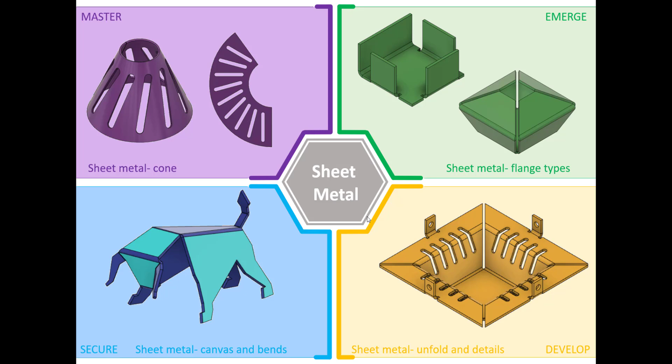So what we're going to do now is jump over to Fusion 360. So we're in Fusion, and what you can see on here is the first challenge. So what we're going to go through is how to set up this sheet metal part and how to create what are called flanges, which you can see around the edge of this design, and also the base is classed as a flange as well.

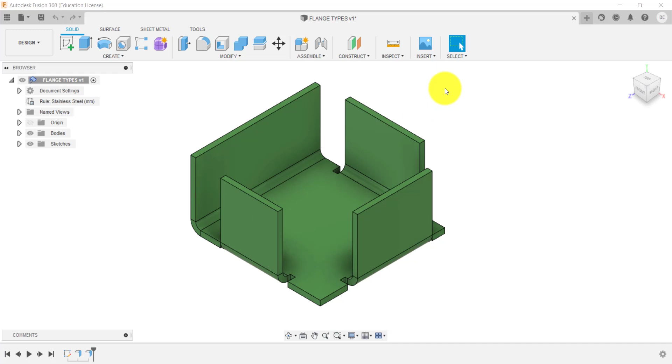So we're going to go up to plus, and we're going to create a sketch in a normal way by clicking on sketch, and I'm going to create one on this top plane. I'm going to create a center rectangle of 50 millimeters by 50, and I'm using the tab key on the keyboard to go between those and click enter.

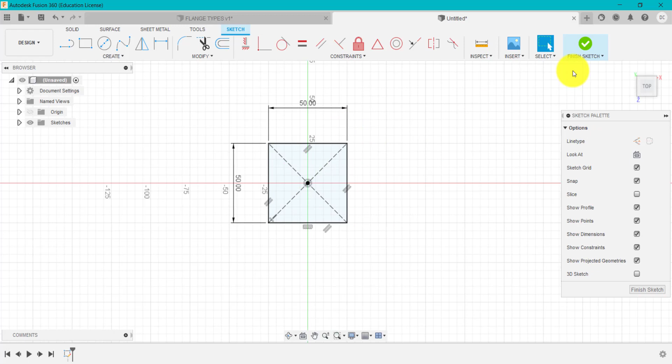Normally, if I wanted to turn this into a 3D shape, I could use any feature around here, like the extrude, and extrude this up to the thickness I want to start my design. However, what we've got to do when we're creating a sheet metal part is go up to sheet metal and create what's called a flange.

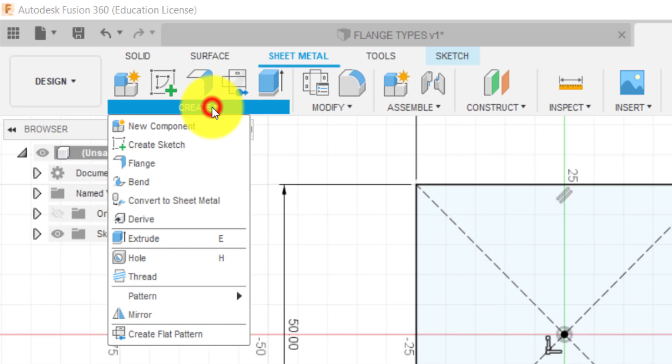I'm going to select this design I've created, and if I go to the front, I'm just going to move this towards one side. What we've got here is side 1. That will create the design above the sketch. If you go to side 2, it goes below, and if you've got symmetric, that goes either side. So if this is a 3 millimeter sheet metal design, it's going to do 1.5 either side.

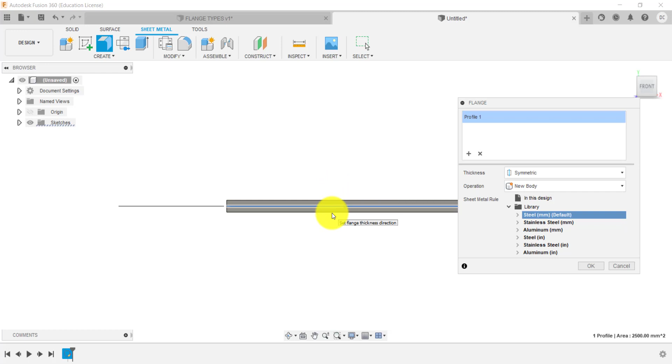So what I'm going to do is just do side 2, and that's going to go on the underneath of the sketch. Here I've got different materials in inches and millimeters, and if I look at the default, for example, in millimeters, it tells me that's 2.5 millimeters thick, and it also looks at the K factor, which is to do with the bends and thicknesses, and also you can see here we've got some other dimensions as well.

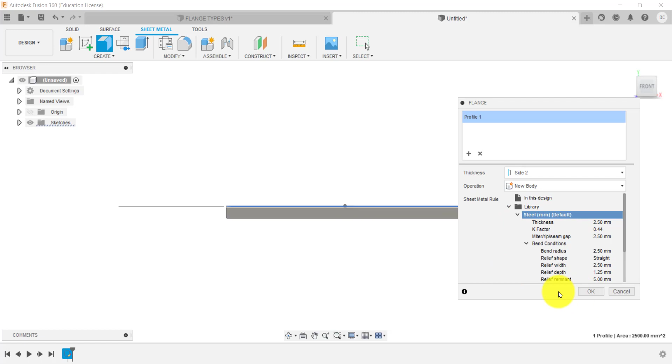But as an introduction, we're going to keep to this simple default. I can show you later on how to change this as well, but we're going to go for the default option. What we're going to do now is add some flanges. And if you hover over the flange tool here, or go create flange, it will give you a bit of a preview of what the tool is used for.

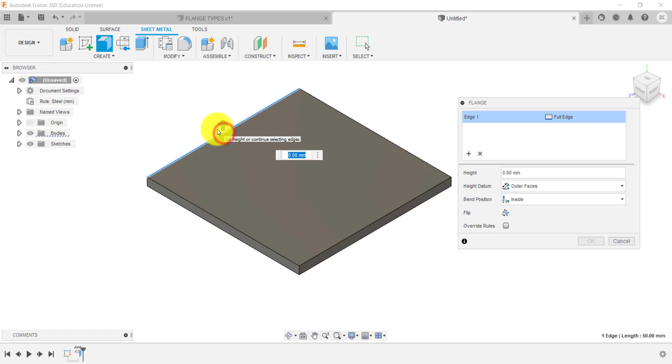So I'm going to click flange, and I'm going to select this edge here. And I'm just going to drag this up. And as you can see, as I drag, it's creating a flange on that particular part. What we've got is a dimension of 13 millimeters as I drag, and it changes here as well. I can also change the angle, as well as the height of that flange. So I'm going to type in 20, and we want that at 90 degrees.

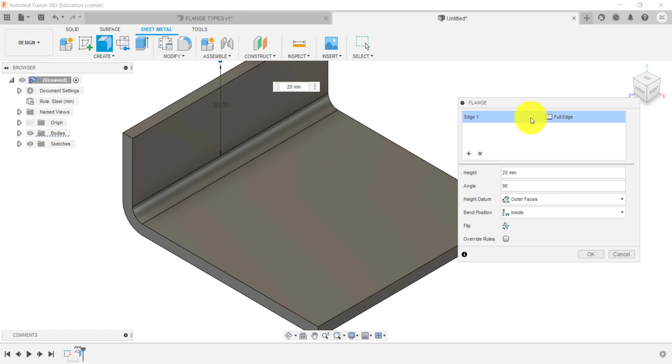If I come to this front view and I turn on my sketch and just rotate this, you'll see what some of these other options do. So we've got the height and the angle. What this is actually is called the full edge. You do have some other options which we're going to go through in a minute, and we'll create those around this design. But for now, what we've got is the height.

So the height is determined in a number of different ways. We've got the outer faces, and as you can see with this icon here, that will go from the outer faces and dimension that up, and we're going 20 millimeters. If we go to the inner faces, that looks at the inner face. Here, it goes 20 mil. So that's 20 mil from there, and in addition to that, the total height will be the thickness of the material.

If we go tangent to the bend, that will then, as it suggests, look at this bend here and go up 20 millimeters. So we're just going to use the inner face one, so from this inner face up here. You then have some other options. So at the moment it's inside, so that's bending and creating this feature inside of my sketch, like so.

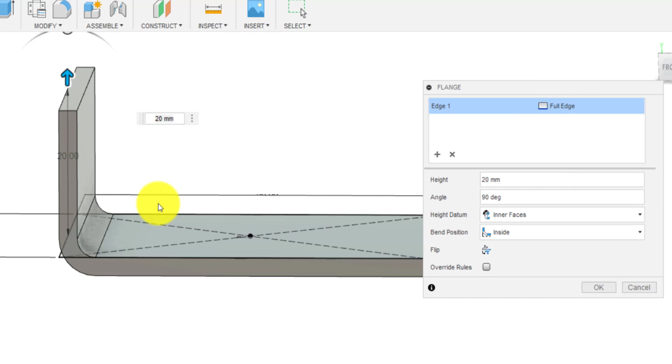And if I created one on the other side using the same technique, I would have the flanges within 50 millimeters. That's my original sketch. So that's on the inside. If I go to the outside, and I've got this sketch here, that face, the inner face, lines up with the sketch, as you can see here. So it's gone on the outside of my sketch. So that's adding, in this instance, 2.5 millimeters outside of my sketch.

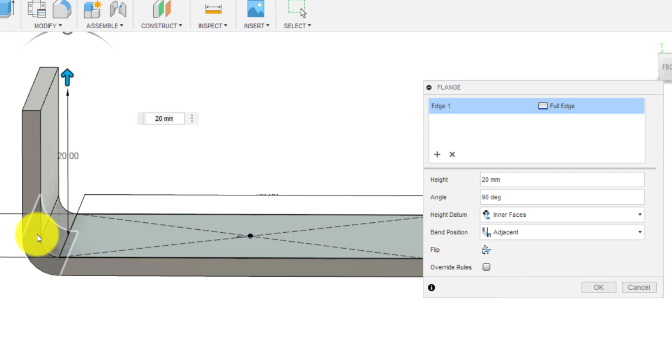If we go adjacent, that basically looks at the radius, this internal radius, and aligns that up with my sketch. When I go tangent, that looks on the outside radius and lines that up with my sketch. So again, you've got a few different options, and it will all depend on what you're creating, and especially if you're going to create two separate sheet metal parts that are going to go together, you do need to take

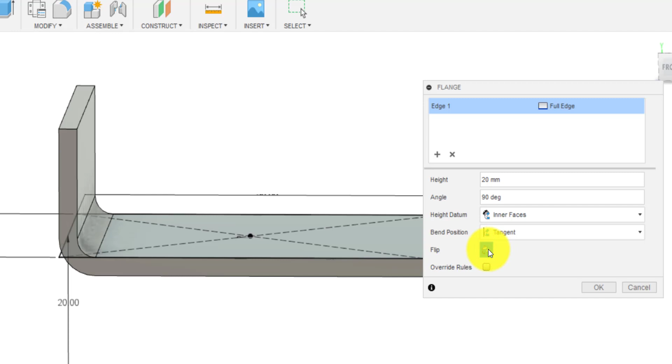this into account. You've also got flip, which will basically, if we go to inside, we can flip this, as you can see, up and down. So if I wanted the bends to go down instead of up, I can just flip that there. And I click on this house just to spin round.

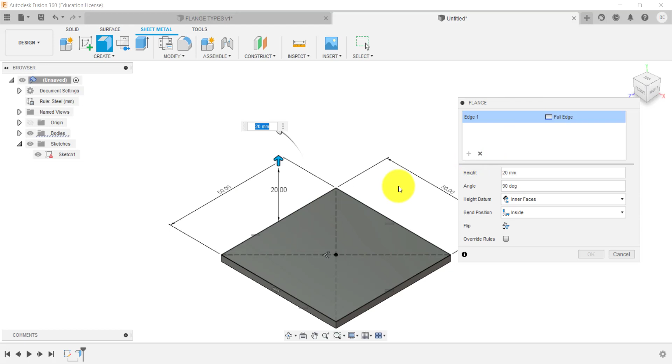What we're going to do then is click on the plus, and we're going to add another flange here. Now, because I'm doing this within the same feature, it's going to keep these details, and that's important. It's going to keep the height, the angle, and these other details here. And again, if I click flip, both those flanges are going to follow. Okay, and that's important to know. However, the first one is a full flange.

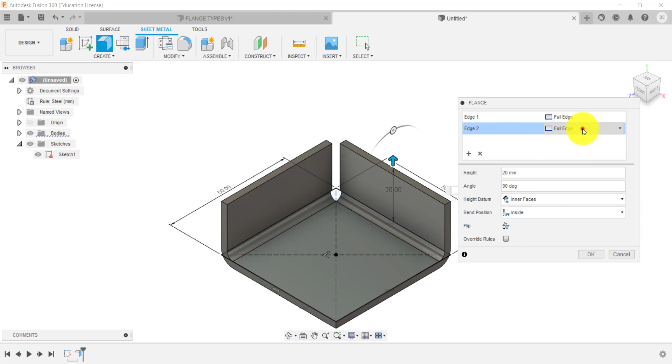If you go to symmetric and drag this in, you will see the distance here, 15 millimeters, is from that edge there, or surface, and again from the back surface, and it's going in 15 millimeters or 5 or whatever I decide to do. Once again, it's going inside because I've determined that when I was doing this one here, and all these are linked together in terms of these features or settings, should we say. So that is what's symmetric. So that allows me to pull in, and the distance I pull that in is the same on both sides.

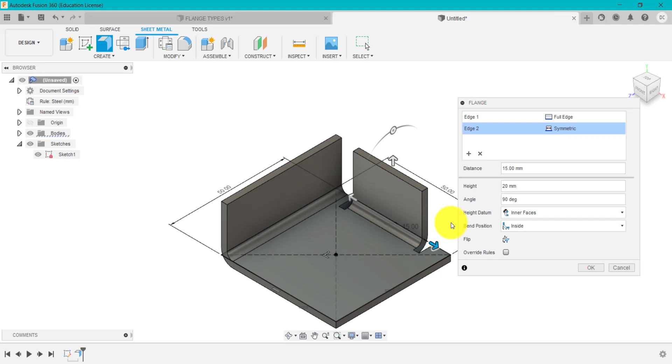If you go plus this time and create a flange, I'm going to go into two-sided. So this is very similar to symmetric, but it gives me another option where I can drag this side in a certain dimension. And if we just move this over, what we can do then is grab this side, and I can actually do that a different dimension. So it doesn't have to be the same on both sides.

Of course it depends on what you're trying to create, but I've got full option there of sliding that up and down. I could type it in here, or I could type it in here as well. So I could go 15 on that one and 25 on that one, for example. All depends on what options you want. So that's the two-sided. So we've gone full, symmetric, same on both sides. Two-sided allows me to control both.

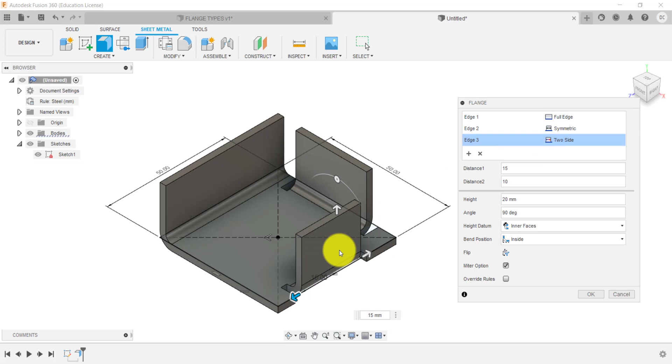And the last option we've got here, if we click this one, is the two offset. And what that would do is it's very similar. That will allow me to do a two offset. And if I just zoom out so I can grab that arrow, as you can see in here, it's very, very similar to the two-sided. But what we're doing on this two offset is the distance from the edge we're controlling. Whereas the two-sided, the distance is from the middle of the sketch, or the middle of that feature. So very, very similar. You get pretty much similar results.

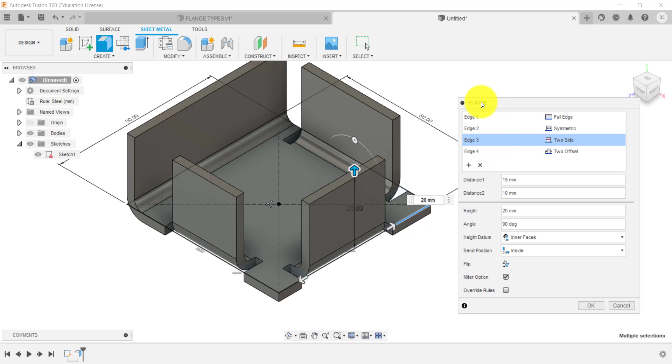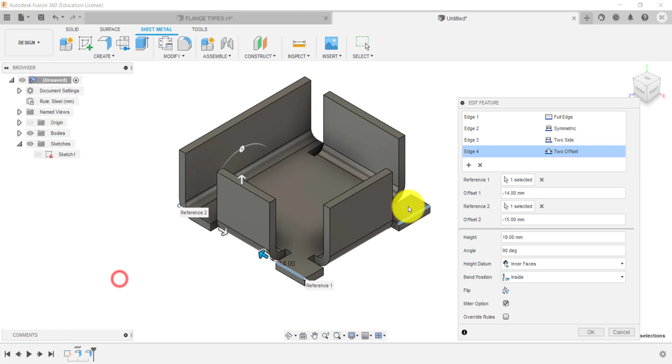Now, because we've done this in the same flange feature, all of these heights will be the same, whether it's inside, outside the sketch, or where it's taken the height from, and the angle and the direction will all be the same. If we click OK, we've then created this design here. Very similar to what I had on my screen at the start. If I wanted to, I could right click on this, and I'm going to delete that last one and click OK. So all those are 20 millimeters.

If I wanted to create a flange here, and I wanted it to be a different angle to these or a different height, I can now do that because I've created a separate feature, and I can go along here and I can adjust this.

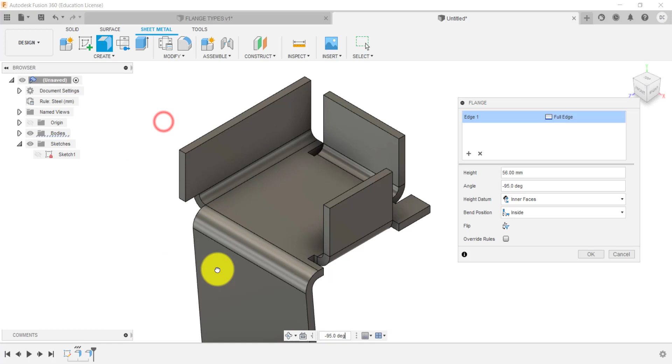Now you've got to be careful, like I've just done there, I flipped it right around and it starts to come up with an error, okay. So you've got to be careful when you're using some of these features, but there you go.

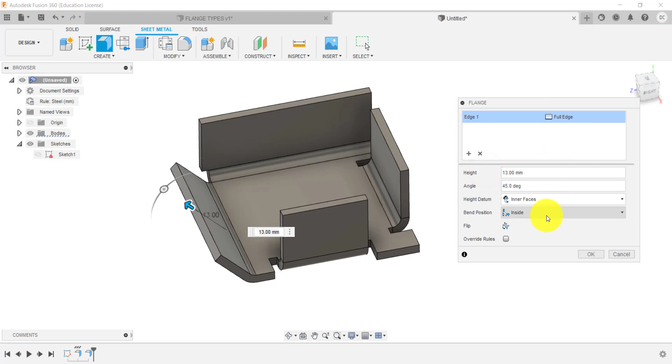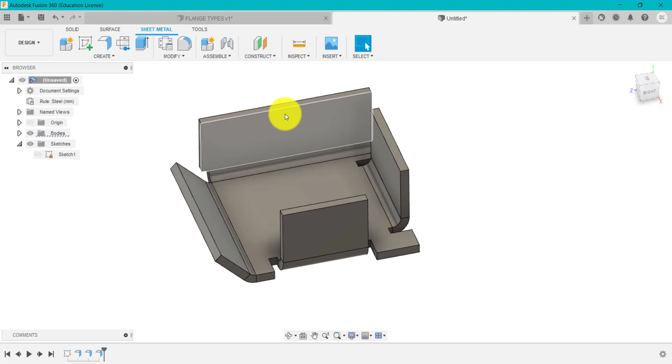So this is now an independent feature, an independent flange, and I've got full control again up here, and I've also got control down here. All right, so that's important to note that if you want to create flanges that are different angles and are independent, you will need to create single flange features, or if you want them to be the same in terms of the height, angles, and where they are created in terms of sketch, then of course you can add them within a single feature.

So there you go. Quite quickly we've looked at how to create a base flange and the 4 sort of different types, and we've also looked at how to separate those as well. The other thing we could do, if we go up to here and click on that, we've then got the options where we're looking at the sheet rules. So that's telling me the initial sheet rules that we've got.

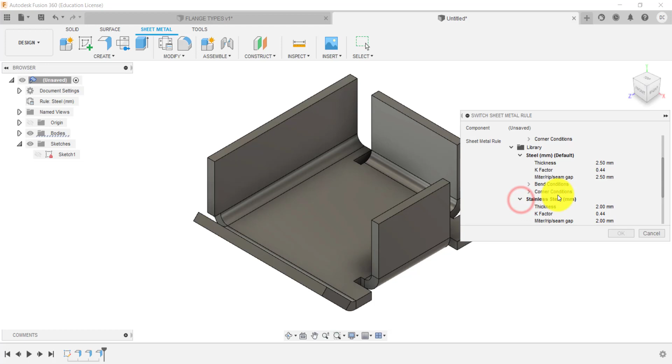And what we can do, we've also got a library here where we can go in there and actually go, well, I don't want it to be that anymore. I can go in here and I can change it. And as you can see, rather than 2.5 millimeters, it changes to 2 millimeters. So once you've created it, if you've made a mistake at the beginning, you don't have to go all the way back to the beginning. The rules are up here, which you can go in and edit, and then you can change those, and everything will then update.

Now, if you do that later on, what you've got to take into account is if you've got another part which this connects to, you may have to adjust some features like sketch or the height and things like that, because you have changed, say, the thickness of that sheet metal part.

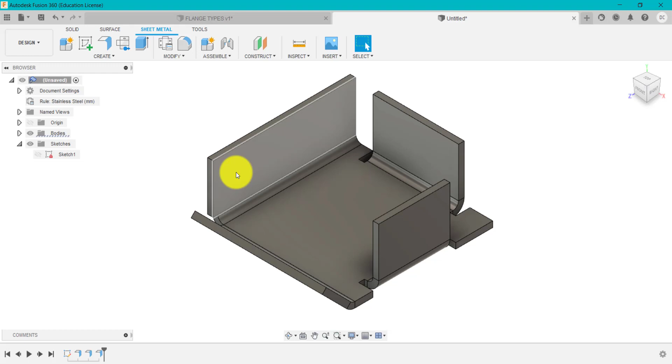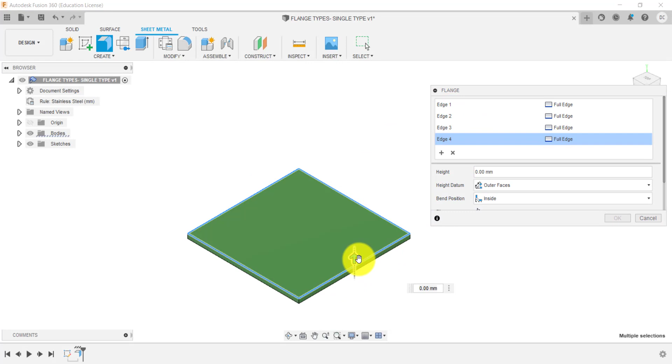Once you've mastered the different types of flanges within a sheet metal part, you can very quickly and easily create very complex designs. So if I quickly show you, we go up to flange and we select using control this top edge of this base flange here. What I'm going to do is drag this up. I'm going to stick to the simple full edge, so that's going to take that full edge there and create a flange. I've dragged that up, and because I've selected all of them at once and it's in the same set, it's going to affect all of these at the same time.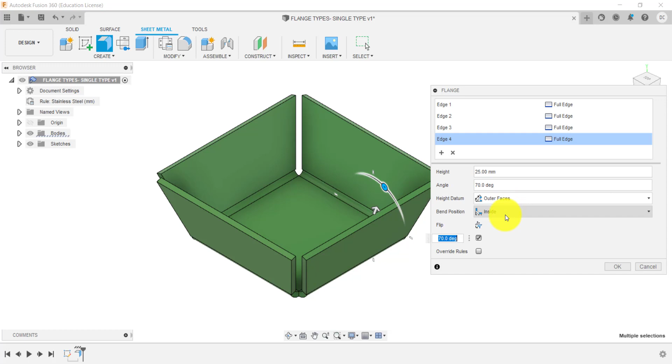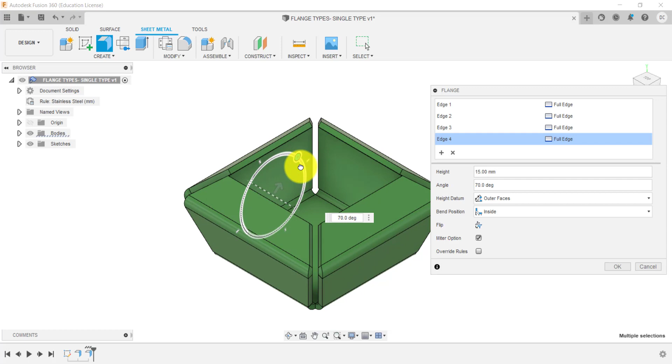But you can see quickly I've created 4 sides or 4 flanges. I've got different options here which we've gone through before, and I'm just going to keep it at those options for now and click OK. If I then come out of that and click flange again, I once again select these edges of the flanges that I've just created and drag again, you'll see what will happen. It'll add additional flanges to that, and again I can change the angle and I can bring that up to whatever sort of dimensions and shapes I want and click OK.

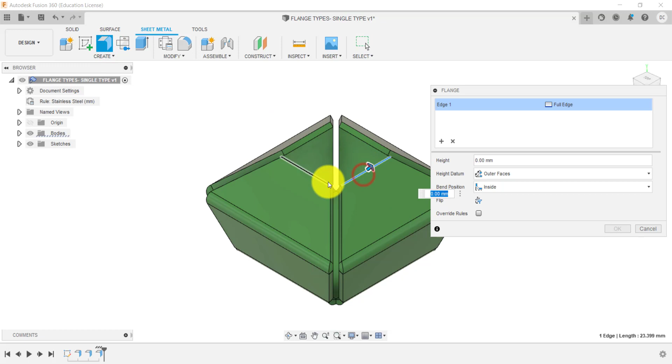And as you can see there, very quickly, within seconds, I've created quite a complex design. And you could keep on going adding to this. So if we go to create again, and you don't have to select all of these at once, especially if you want to adjust them individually and do different designs, but I'm going to grab that one again and I'm going to grab that and pull that out.

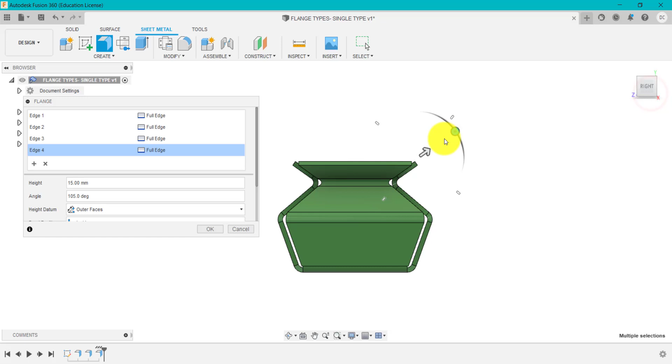And if I just zoom out actually, so if I click and zoom out, and I can just change that angle. Go to the right angle and we'll grab that and just pull that down to here so you can see. And what I'm going to do actually is increase that and click OK. And again, I'm creating sets now of these. So you can see there, very quickly, I've got this very complex sort of design.

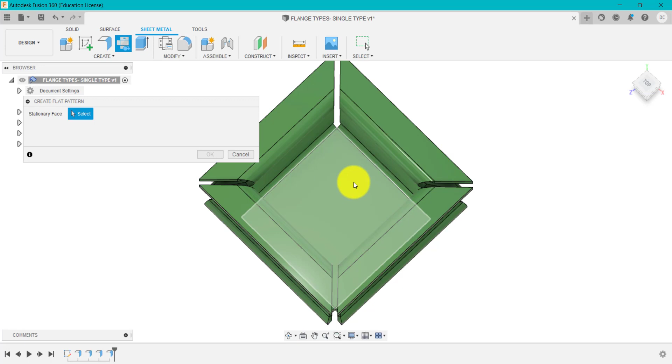And if we go up to create flat pattern, and I select that to be the fixed face and click OK. After a few seconds, there you go, it's created a net. Very simply, very quickly, and that can be exported for manufacturing.